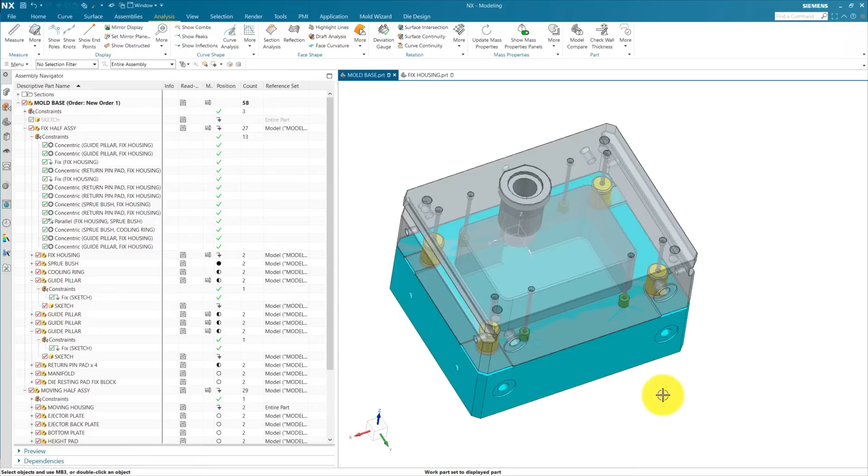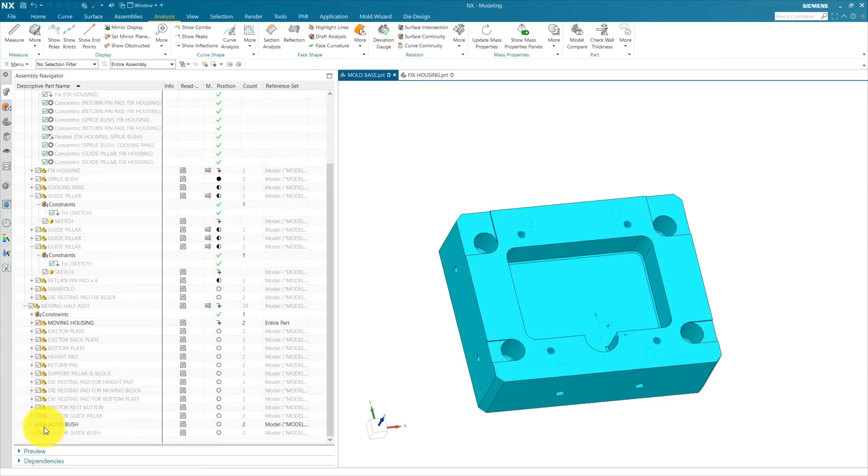First we are going to hide all our assembly, so our moving housing guide bush part. Activate our guide bush part and you can see there is a sketch part inside.

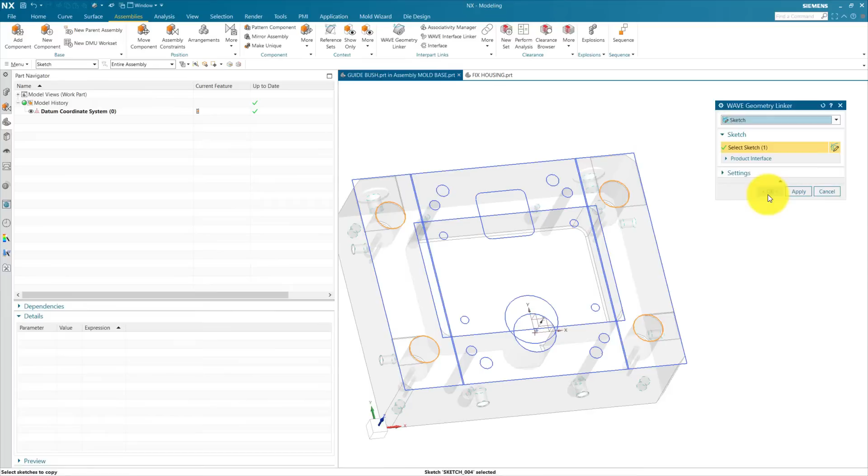We need to link some sketch inside our guide bush. So first we go to assembly and then go to WAVE geometry linker, link some sketch from our sketch part. We need to link this sketch which is used for our guide bush and pillar. Press OK, now you can see the sketch is linked inside our guide bush part.

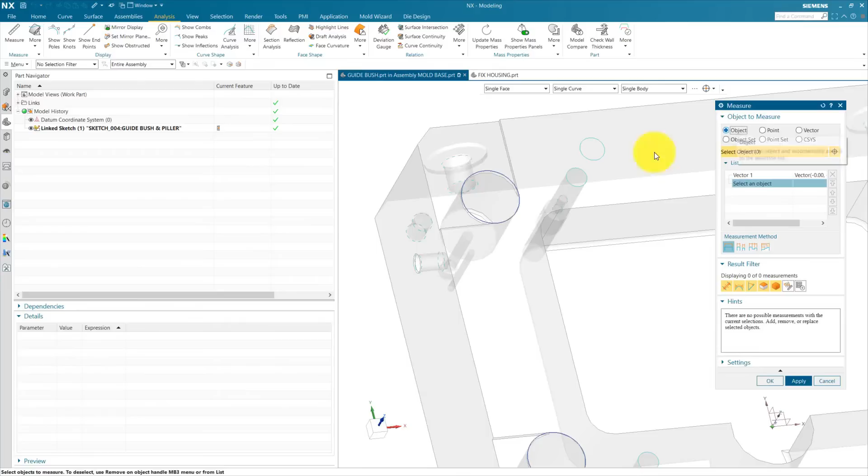Hide this sketch inside our guide bush, go back to part navigator of our guide bush part, extrude this sketch. First we are going to measure the height from this face to this face. This is 100, so we are going to extrude this 100 mm height. Select single curve and make this 100 mm.

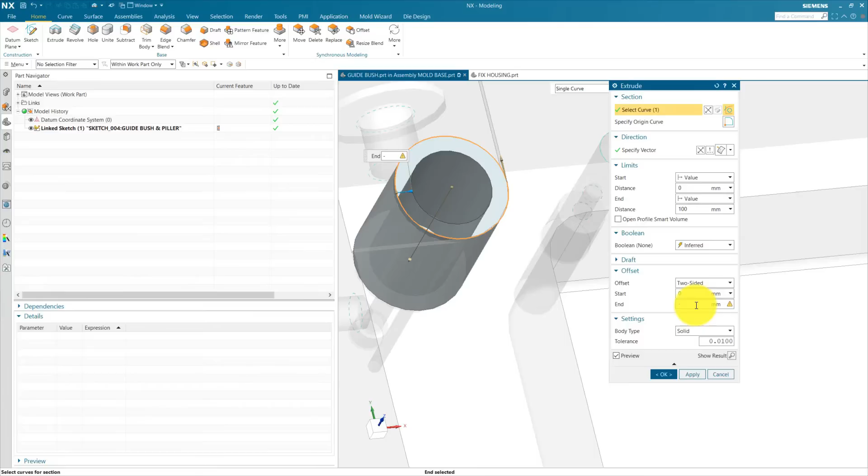We are going to use offset, two side offset, and add some thickness inside. Per side we use 7.5 mm thickness for our guide bush. Now press OK.

Now hide this moving housing. Go to extrude, go to part navigator and select this edge, and we are going to add a thickness from bottom, 10 mm thickness. We use unite. Press OK. Add some relief

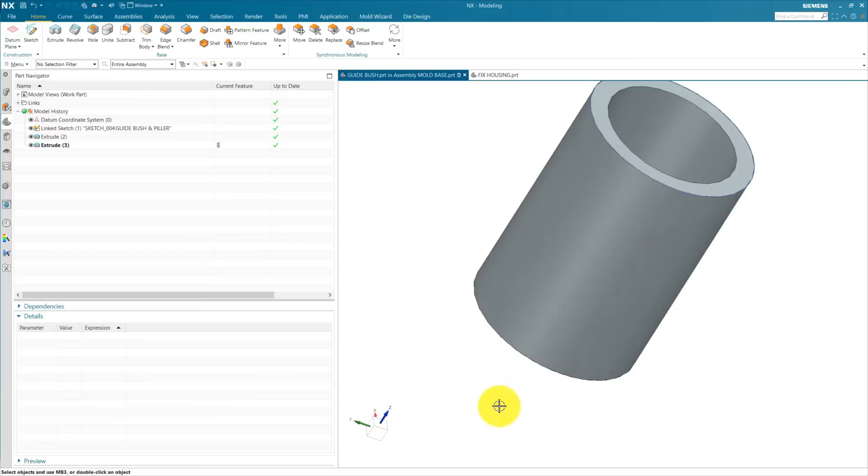like we provided in our guide pillar also. For this we are going to select this edge and reverse the direction. We use 15 mm. This time we are going to use two side offset and provide a 1 mm relief per side.

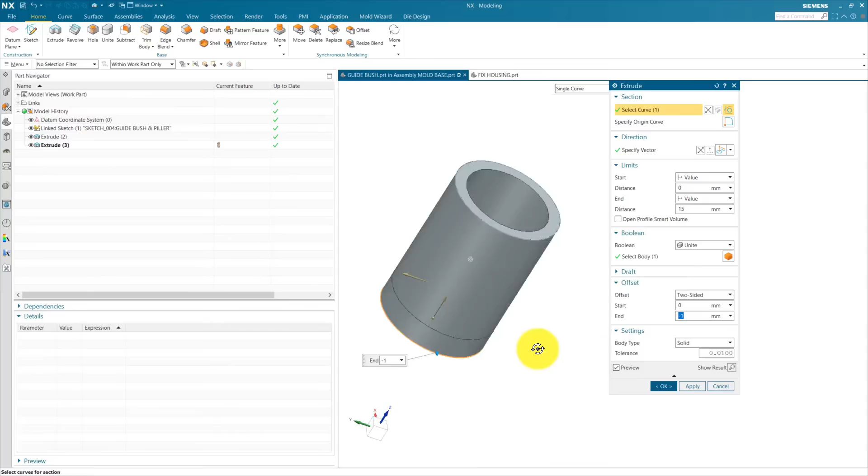Now go to subtract and press OK. Go to chamfer, add a chamfer here, bottom side 3 mm chamfer, and you can add chamfer here with smaller 1 mm. Now hide this sketch, add some radius, go to edge blend, add a radius here and here, 2 mm radius.

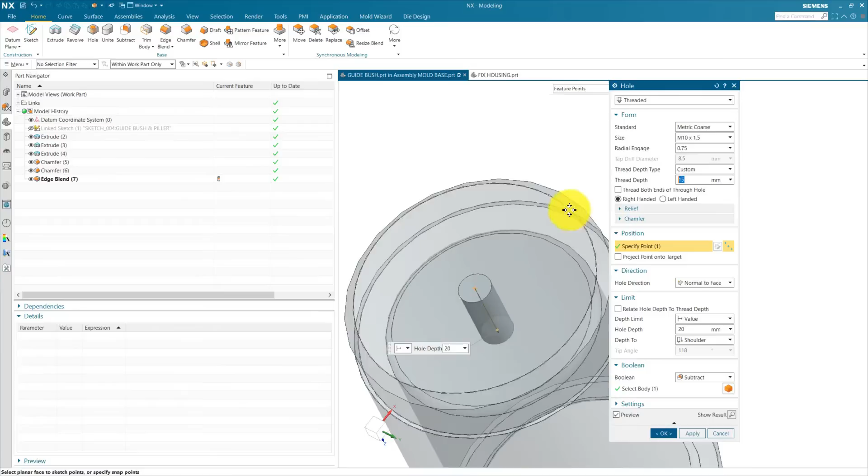Now we are going to add a bolting hole. Select a point in the bottom face in the center and we are going to use M12 for that. We use full length and depth is through all body.

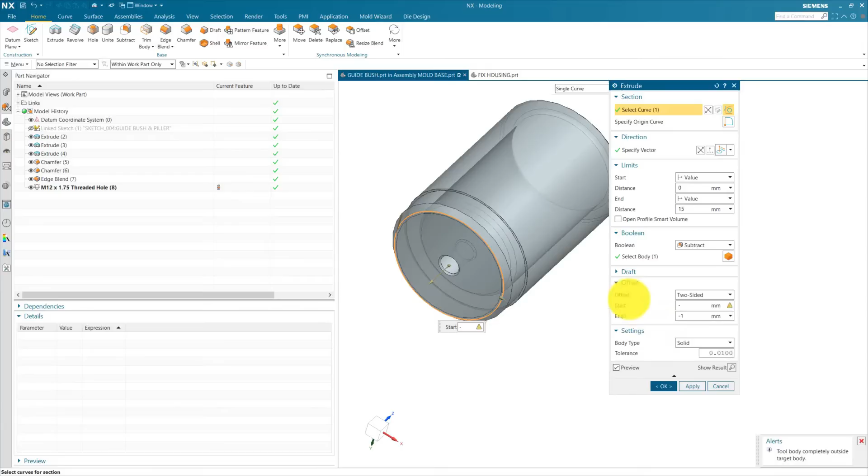Provide a slot for escaping the air. For this go to extrude, select this outer edge. We need to create a groove. For this we are going to use offset, two side offset. For example here we use -13, we use -5. The depth we use is 1.5 with subtract.

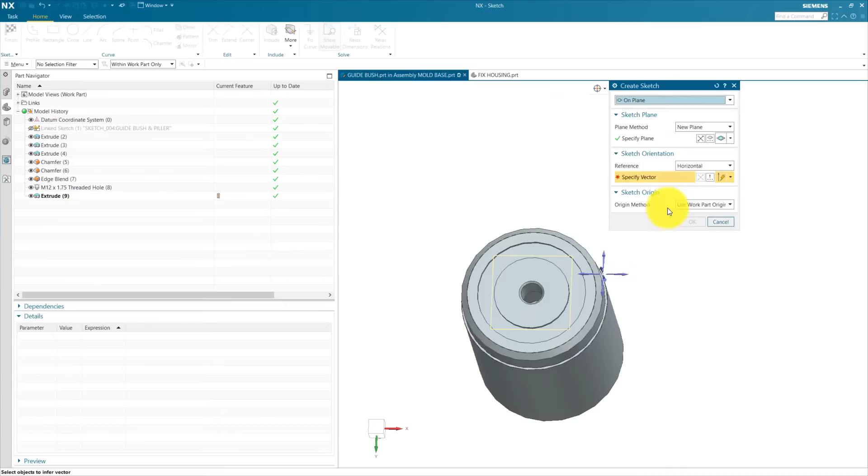We created this groove and now we are going to create a hole inside this groove. Go to sketch, select this bottom face, define a horizontal reference, create a circle, pick the center, convert this to reference. Take a reference of this and this.

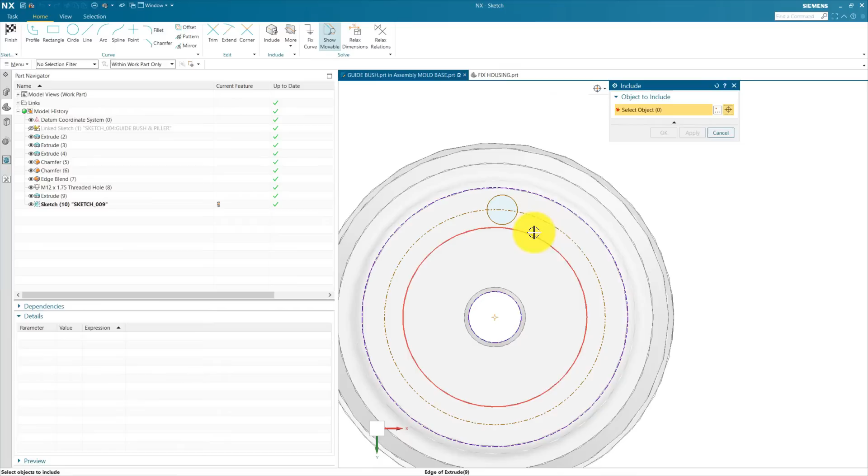and we are going to use tangent. Select this as a motion face and this as a stationary face, and same we are going to use this as a motion face and this as a stationary face. Check the diameter, this is 8 mm. Define according to tangent, center is 44.

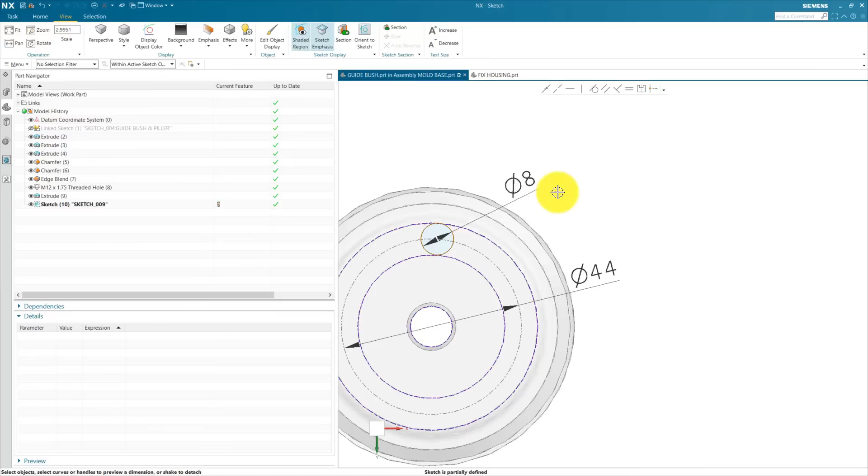I am going to increase the text size so you can see. Now the sketch is partially defined, so we need to define an angle. Pick this center and this center and make this vertical. Now change it to reference. Now our sketch is fully defined, finish this sketch.

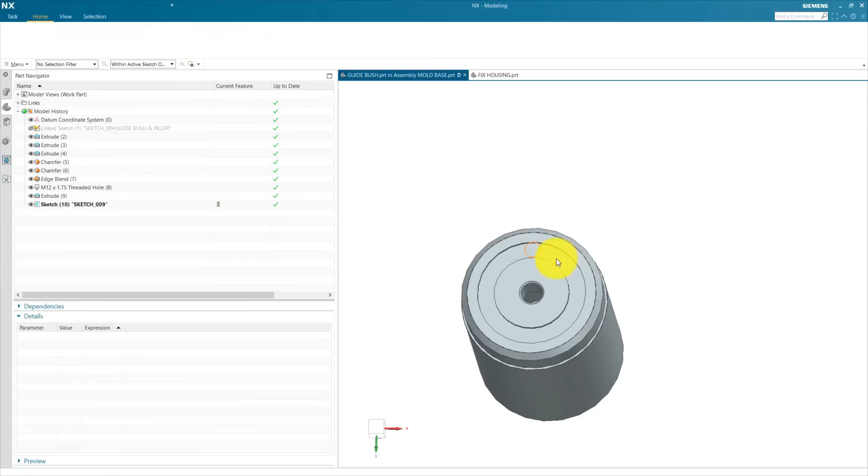Go to extrude, subtract this through all, press OK. Hide this curve. Now we need to check this groove size according to our moving housing.

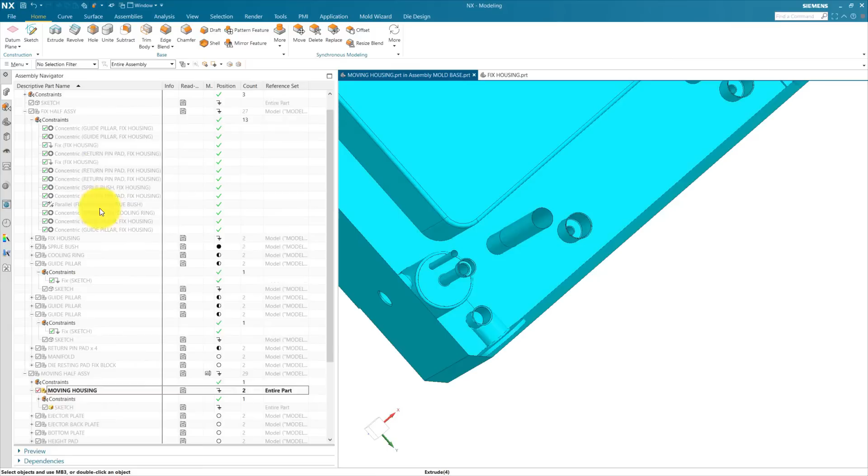Go back to moving housing, activate our top mold base assembly. You can see the hole which is inside our guide bush is aligned with the hole which is provided in our moving housing. This hole is for air.

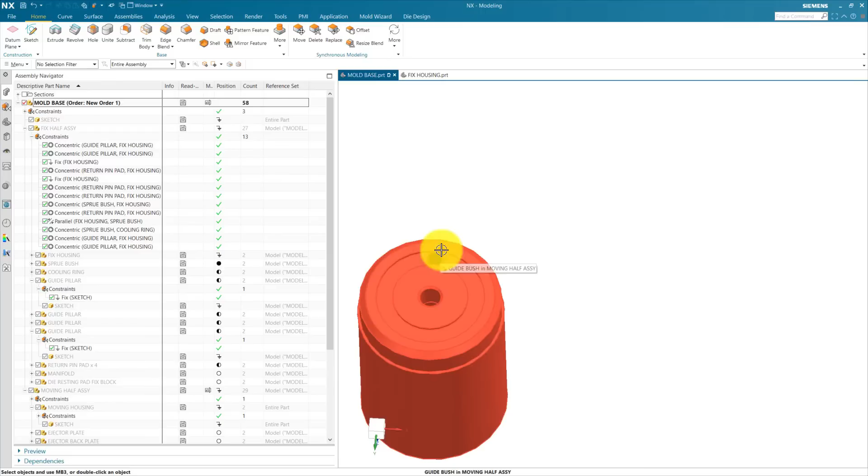The air will escape from this hole, and there is a groove provided in our guide bush. So when our hole is not aligned with this hole, the air will still be able to escape because our guide bush can rotate on its axis.

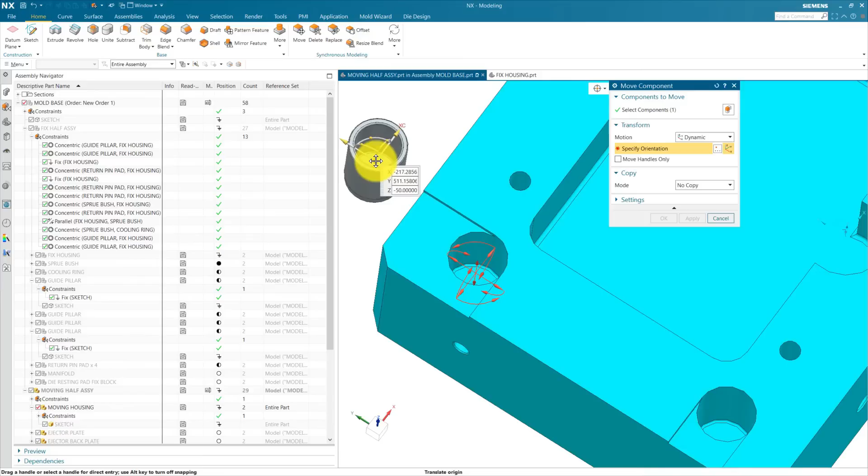So now go to moving housing, constrain this guide bush. Now you can see our guide bush has 3 rotational and 3 translational degrees of freedom. To constrain this, we need to first move this guide bush outside the moving housing.

Constrain this, go to assembly and go to assembly constraints, and we are going to use this constraint, top face edge and this edge, and apply. This bush is perfectly assembled.

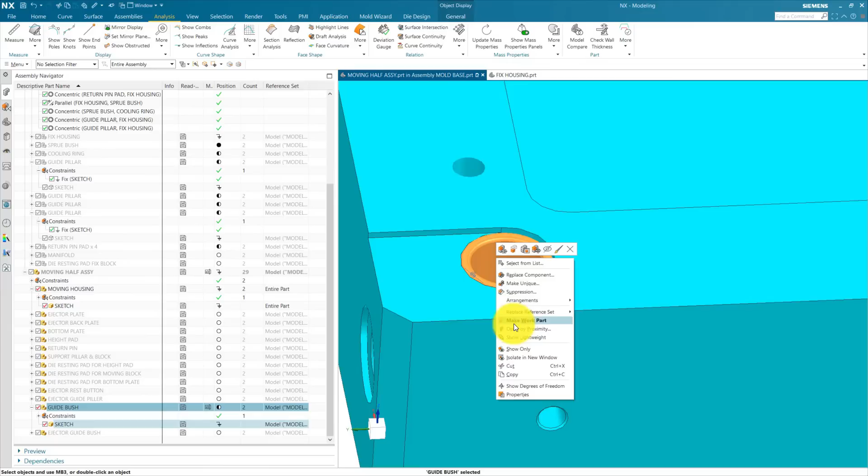Now we are going to copy this guide bush. Go to move and copy. Okay, you can see the degree of freedom, there is only 1 rotational degree of freedom available in our guide bush. That is okay for our assembly.

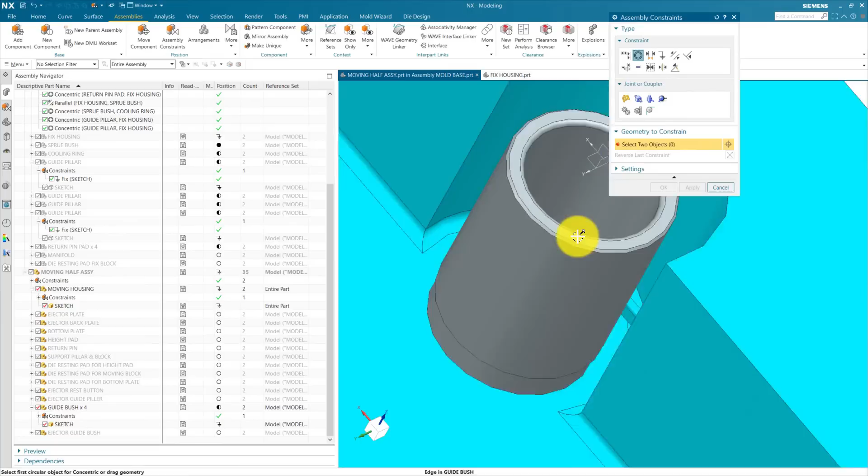Go to assembly constraints and select this constraint, select this top curve and select this edge. Apply. Repeat this process. Now all our guide bushes are perfectly assembled.

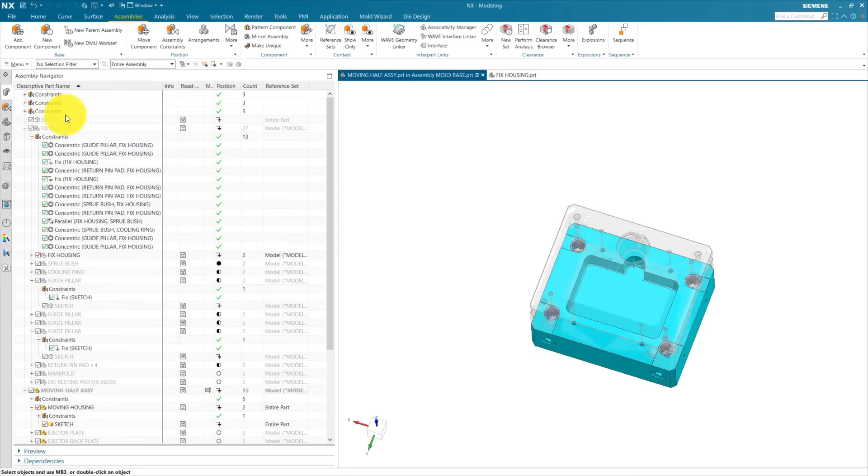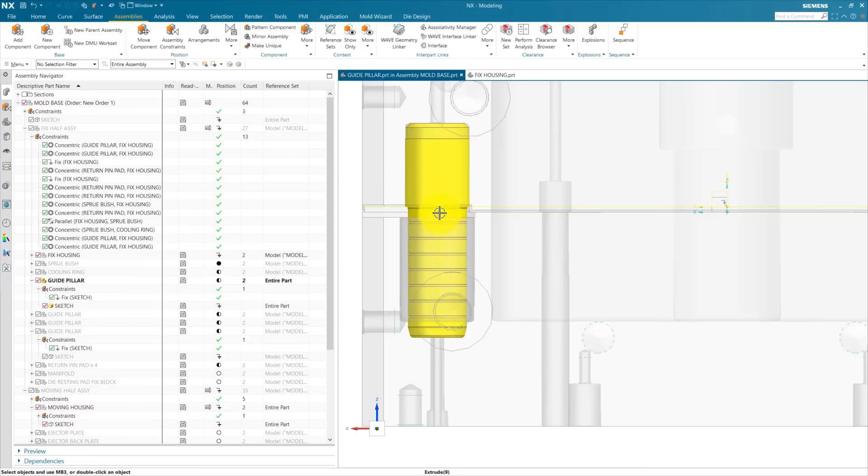Now we are going to show our fixed housing and our guide pillar. We are going to make this moving housing a little transparent. Activate our top level assembly. You can see our guide pillar is extended from our guide bush, so we are going to reduce the height of this guide pillar, maybe to 95.

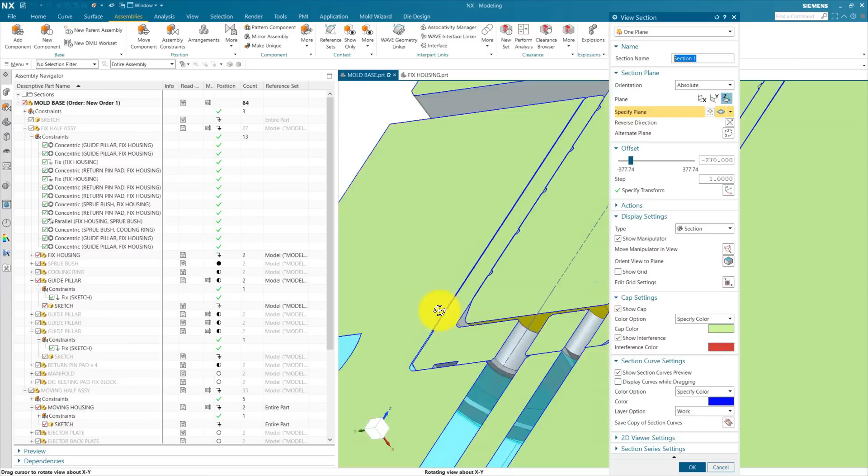We're going to use 94. Now we are going to check, so there is a gap between our guide bush base and our guide pillar top. All guide pillars are automatically updated.